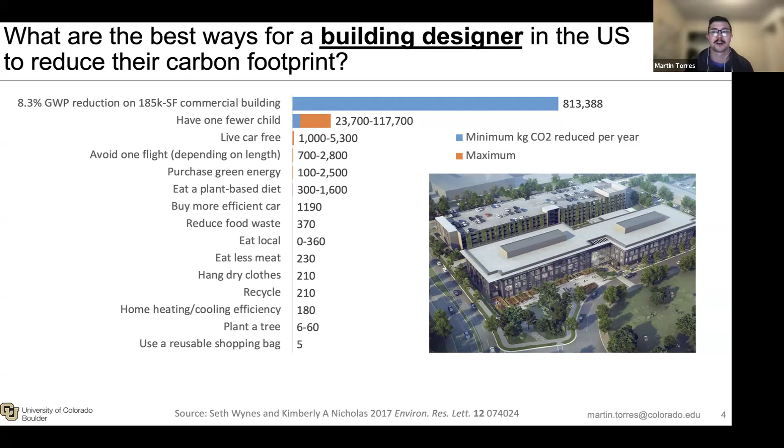So I think it's really important for us as building designers, as people in this space, to realize the potential for reduction that we have, and this massive responsibility, not just in our day-to-day lives in terms of living car-free and doing these other things, but much more so on the buildings that we're designing. We need people in the building space to measure and reduce embodied carbon on their projects. But how do we do that?

The main tool that people use is called life cycle assessment, LCA. Again, we're talking about embodied carbon, that's greenhouse gas emissions from the building materials, not operational emissions from energy use. LCA, at its most simple, works like this: you have some sort of material quantity estimate for each material in a building. So you figure out how much stuff is there, what type of stuff it is. For each of those materials, you find an embodied carbon coefficient. So what's the history of this material? Where did it come from?

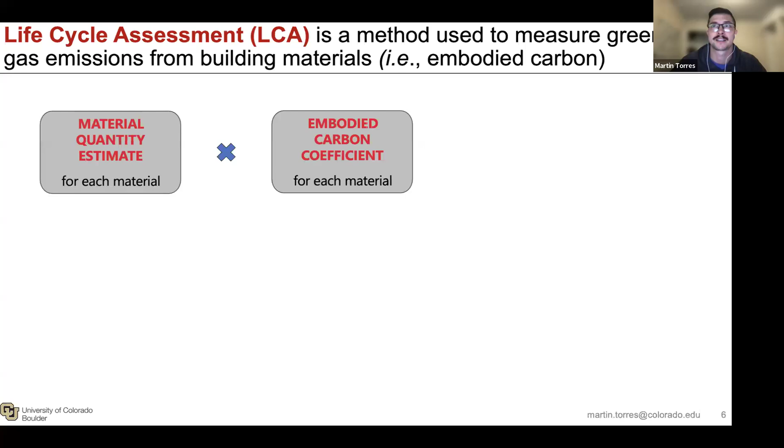What are the emissions that took to get this material from the earth into the building? You multiply those together and then you add them up across materials. So very, very simple, very, very easy calculation. Why would you need to do a whole PhD about this, right? So LCA is typically a deterministic process, just like this.

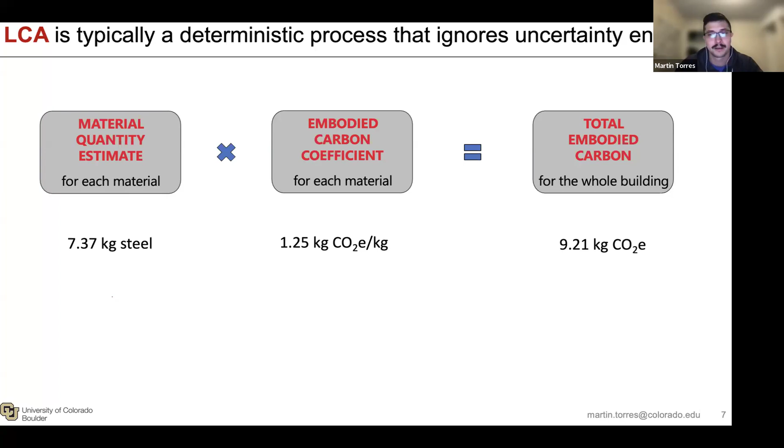We're ignoring uncertainty entirely. Now, what I mean by that is that in terms of our material quantity estimate, we have a single value estimate; in terms of our embodied carbon coefficient, we have a single value estimate. So we have a given amount of steel, we have some specific amount of embodied carbon per kilogram of steel. We multiply that together and we get our total embodied carbon, and then we can add it up across different materials. But that begs the question, how precise are these values?

Do we know that it's 7.37 kilograms of steel? Do we know that it's 1.25 kilograms of CO2 per kilogram of steel? And to answer that question, I think it's important to figure out, where did we get this data? Where are these assumptions coming from?

I will note that my research, this presentation, we're focusing on the embodied carbon coefficient. There is certainly also uncertainty associated with the material quantity estimate. I mean, you think about how a project evolves from SD to DD to CD, and then what changes happen as it's getting constructed. But today we're just focusing on the embodied carbon coefficient.

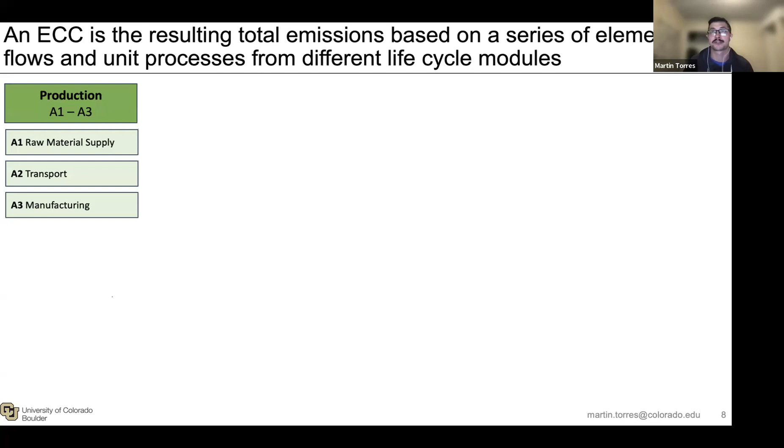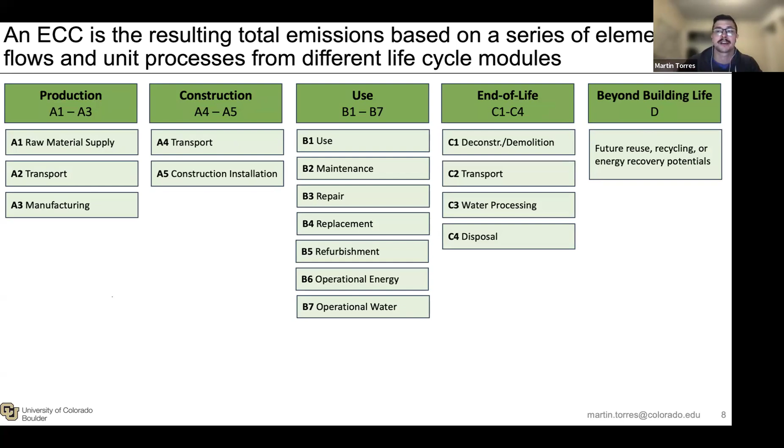So an embodied carbon coefficient, an ECC, is the resulting total emissions based on all these different processes from different life cycle modules. So we split it up into different categories from the life cycle of a material, starting with the production phase, A1 to A3. This goes through construction, A4 to A5. The use phase, once it's in the building, B1 to B7. End of life, so end of the building life, and then beyond building life. So if you're extending the life of a material beyond that of the building, reusing it or recycling it in some way, that's module D.

And these can get categorized in different ways. So A1 to A3 is considered cradle to gate. This is where the majority of emissions happen. This is also where we have generally the highest quality data. There's also cradle to grave, going through end of life. Or you can do cradle to cradle if you're considering how that material exists beyond the building life.

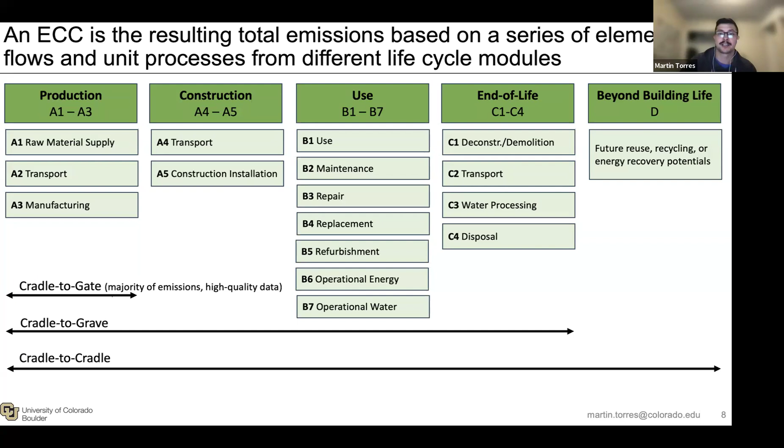So this is all kind of the scope of what an LCA might consider. We're going to focus on the production stage. Again, it's where the majority of emissions happen. It's where we have the highest quality data. And when you do an LCA of a specific building material, a specific building product, these results are communicated in the form of an EPD. Yeah, this is typically A1 to A3, but this is the scope that we're focusing on.

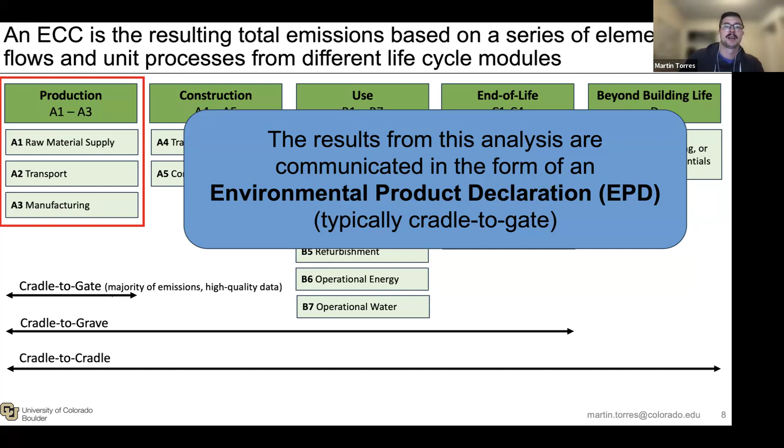So EPDs vary in scope. You can have generic EPDs, you can have supply chain or product specific EPDs. A generic EPD might be what you've seen from NRMCA. So they kind of take their best guess at this strength of concrete in this region looks something like this. Here's our best estimate of what that looks like. So it's kind of trying to capture a range of different concrete products.

And then on the other side of the spectrum, we see supply chain specific or product specific EPD. So this is an EPD for an exact mix of concrete from a specific plant. But the reason that this is a spectrum and not just 2 separate points is the source data for a supply chain specific EPD can also vary in scope. So maybe it's relying on very specific measurements taken at that facility. Maybe it's relying on more generic data. Maybe it's relying on some sort of assumptions to inform that specific concrete mix.

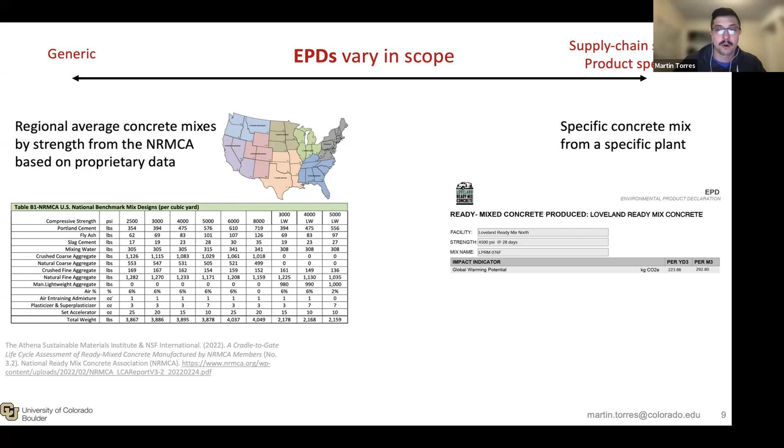So the whole point of this is there's a big range in scope in terms of these EPDs. Not all EPDs are created equal. Some of them are informed differently. Some of them are much more specific to specific processes.

And part of the problem for designers, when faced with product-specific EPDs or industry average EPDs, is which one do you pick? And we certainly don't have EPDs for all materials or all products. So if I don't have an EPD, do I pick a deceptively precise industry average EPD that's based on data that I haven't seen? Or do I pick a potentially inaccurate EPD that represents maybe a similar product to what I'm using, but not the exact product that's going into my building?

So many products don't have EPDs. So if you don't have a specific EPD for what you know you're going to use in your building, which one of these do you pick? This uncertainty can be particularly relevant in early stage design.

So if you're just starting a project, you might know, well, I know I'm going to have a 4 KSI mix for whatever sort of assembly, but I don't know who I'm going to get it from. I don't know where it's coming from. And so how do we reflect that uncertainty rather than picking a potentially incorrect value?

And any of these deterministic methods, so if I'm in any way picking a single value, that's hiding the underlying uncertainty. So what other data is available? What other information might go into this decision? So what if we created a probabilistic model to represent this uncertainty?

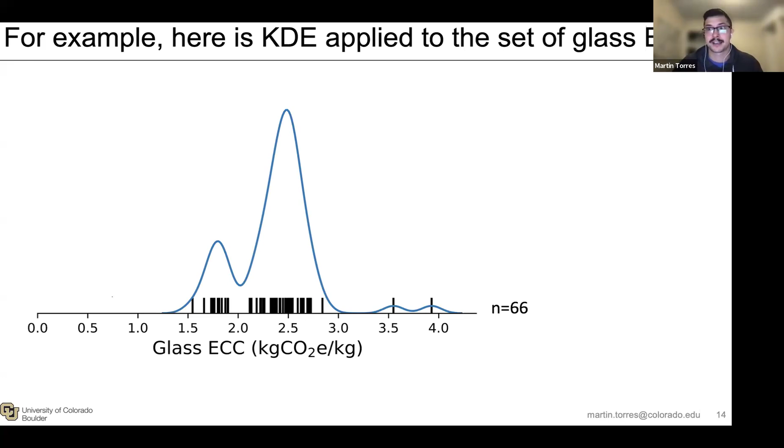So when we use KDE, it fits very closely to what we think the data looks like. So it's capturing the irregularities of the underlying data set. If we look at a normal or a log normal fit, or basically any other distribution, it's hiding those underlying characteristics. So we're masking what the data actually looks like in favor of a more simple distribution. And through this research, we show that KDE across different ranges of data sets more closely adheres to that underlying data. So more often than not, it is the closest fit to the data.

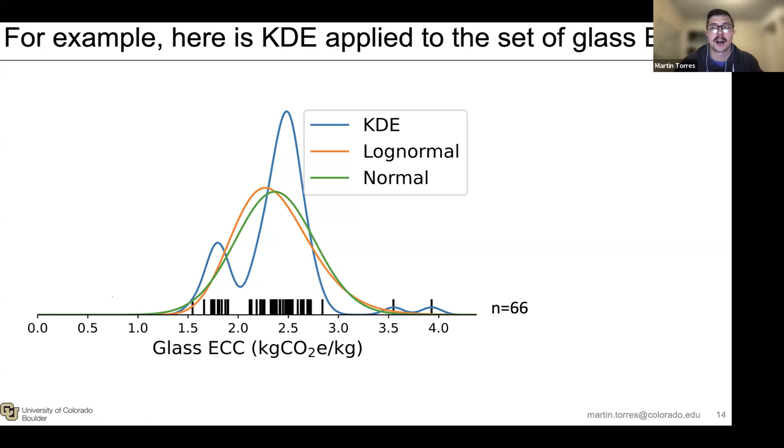So how do we use KDE in a probabilistic whole building LCA? So if I do an LCA using this method, what does it actually look like? So step 1, if we're doing an LCA of a building, we need to get our material quantities for the building, same as a normal LCA. Then we obtain sets of embodied carbon coefficients for all of those materials. So we look at which embodied carbon coefficients might be relevant for our material queries. Then we use KDE to create our probabilistic ECC models.

From there, we use a technique called Monte Carlo simulation to perform our probabilistic LCA. Now, basically what that looks like is we have a series of distributions. We randomly sample from each of those. We multiply it by the material quantity, and we get a result. But then we repeat that process, randomly sampling, multiplying, and we get a set of, let's say, 10,000 results. And so then those 10,000 results would reflect our range of expected results, because we've randomly sampled from all our input distributions. So this is what we think is a reasonable take on the range of expected results.

So for the results, we're looking at whole building embodied carbon intensity. And sorry, when I say embodied carbon intensity, we calculate our whole embodied carbon and we divide it by the floor area of the building. Some people use conditioned floor area, some people use gross floor area. In this one, we use conditioned floor area. So we have our set of expected values for whole building embodied carbon intensity.

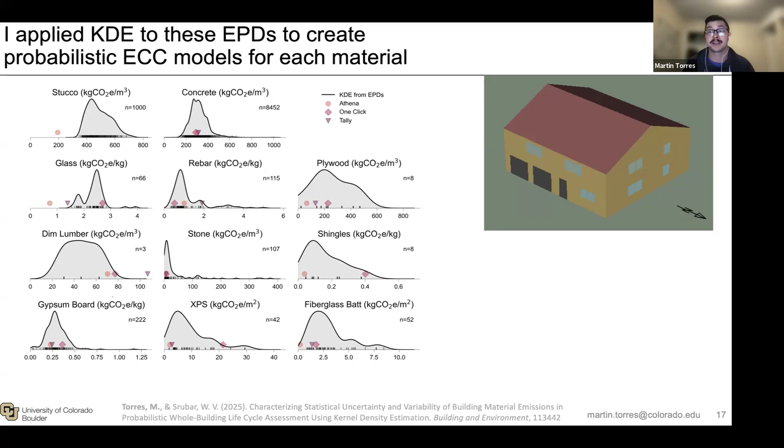Now we're showing these results alongside deterministic LCA values or ECC values from Athena, One Click, and Tally. So you can see those nestled in these probabilistic models just to show how closely they align with industry expectations. But this is what we're using. So when I mentioned the Monte Carlo simulation, we randomly sample from each of these distributions, multiply it by the quantity, add them up, and then repeat that process to get a range of expected results.

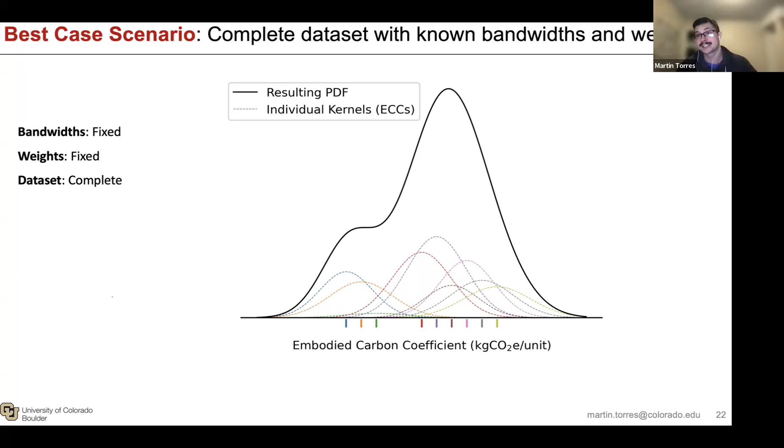But that is entirely unrealistic. EPDs don't really have specific weights. We're not always going to know all these different features, but this is kind of that gold standard that we're aiming at. But because we're not likely to have all this information, what can we do?

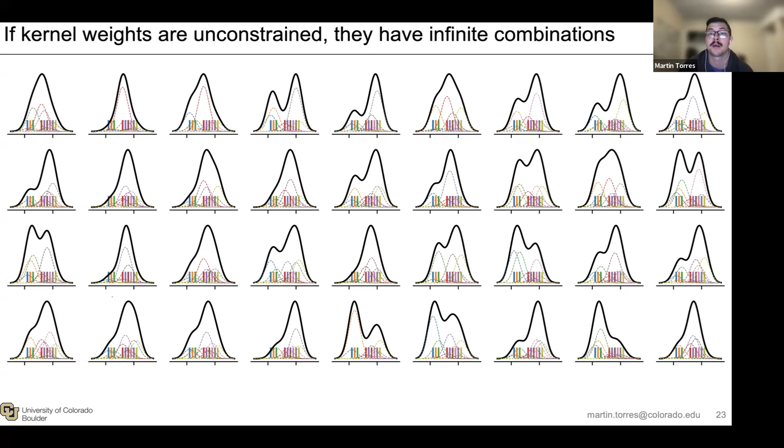So if kernel weights or the material quantities are unconstrained, we basically have infinite combinations. So if we don't necessarily know that they're equal, but we don't know what they should be, well, there are infinite answers to that. In this kind of made up case, we have 9 values. So how many ways can 9 values add up to 100%? And how does that change what the probabilistic model looks like? So basically what we can do is we can explore different solutions in this space. We can explore different viable combinations of these weights that fit our constraints.

So if we don't know anything about the weights, we're going to explore all possible combinations. And at this point, basically we have uncertainty about our uncertainty. So if we're saying we don't know what these weights could be, here are all the combinations that they might be, here's how much our resulting probabilistic model changes. So here's kind of the fuzziness around that probabilistic model that lets us know how confident we should be in it.

And by randomly sampling through these weights, here we have 9 values. So each of them, we're assuming we don't know that one might be bigger than the other. So they have the same average of 11.1%. But we're randomizing how we combine them. And so this is exploring all feasible solutions of 9 values that add up to 100%.

But if we think about how we might actually get material production quantities, they're usually in some sort of aggregated format. So here's an example for steel. To get steel production data, World Steel produces it by country. So if we look at steel by country, then that's kind of our subgroup that we can consider. So we have total steel, we have an amount of steel from the US, that's 4.2% of global steel production. If we have 66 EPDs, what we can do is we can vary the weights of those 66 EPDs such that they always equal 4.2%. And I'll show you exactly what I mean by that.

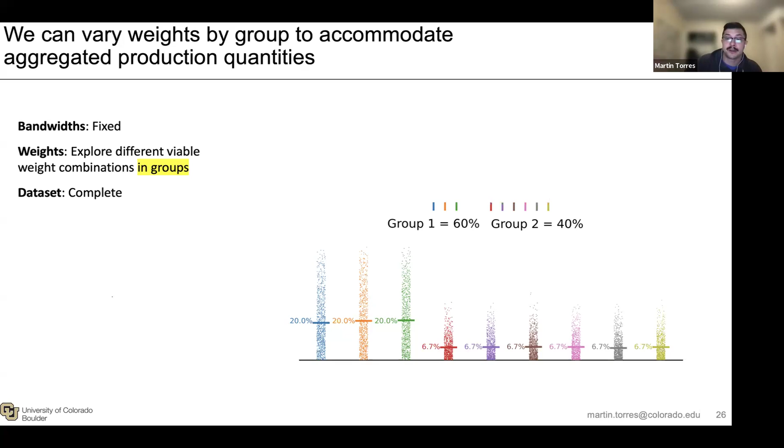So in this instance, rather than exploring all of the weights separately, we can explore in groups. So if we know group 1, these 3 values, represents 60% of the data set, then we randomly sample from these 3 values, with a mean of 20%, in all different ways that 3 values can add up to 60%. Now, if the second group, the other 6 values, adds up to 40%, we do the same thing separately with those values. And then that's reflected in our model.

So in every single instance of this model, group 1 adds up to 60%, group 2 adds up to 40%, but we're exploring different viable combinations of those weights, because that's kind of how we get our material production data.

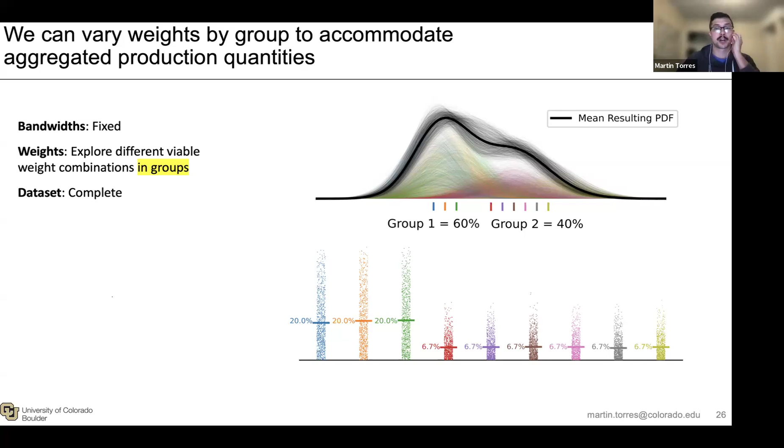Now we have 2 other things to account for: unrepresented data and the industry average ECC. But let's recap what we've covered this far. So the first version, KL1, doesn't consider important EPD features. KL2, we're trying to accommodate that. So material production quantities, that corresponds to kernel weight, or the size of the kernel. If they're unknown or we have grouped weights, we explore multiple viable weight combinations given those constraints.

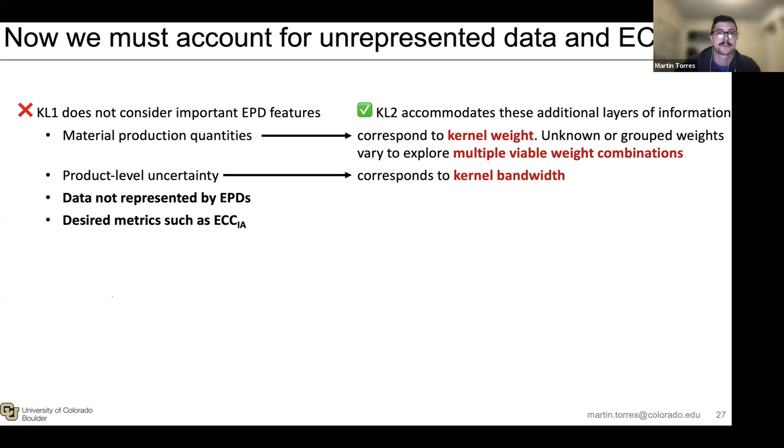Product level uncertainty, so depending on how much generic or supply chain specific data we have, that corresponds to kernel bandwidth, or the width of each kernel. Now the 2 remaining bits, data not represented by EPDs and desired metrics such as the industry average ECC. So our problem is if we apply uniform kernels, the resulting plot does not necessarily have an expected value equal to our industry average ECC.

But if we have unrepresented data, what if we simulate that unrepresented data such that the expected value of the resulting plot is equal to our industry average ECC? So we're kind of using that as our target expected value, and then we're simulating this phantom kernel that captures unrepresented data. So if my EPDs represent, let's say, 80% of the market, then that phantom kernel would have a weight of 20%, and we would put it in a place such that the expected value is equal to our target, our industry average ECC.

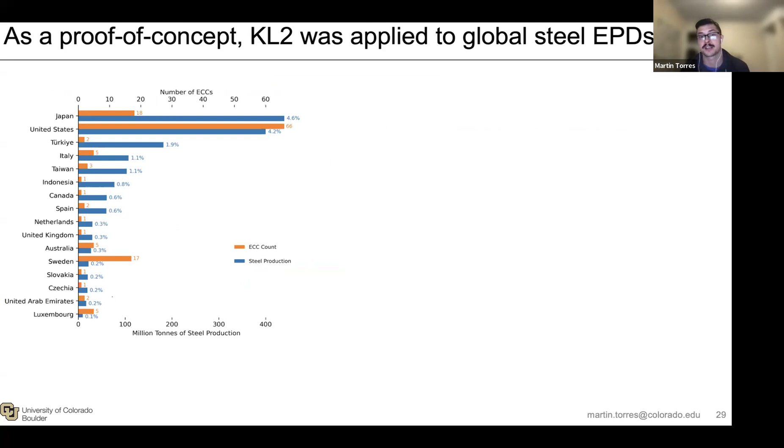So as a proof of concept, we apply this method to global steel EPDs like I was just showing. So we have a number of EPDs from all these different countries. Here you can see both the proportion of steel production and also the number of EPDs we have from each country. So for the US, again, we have 66 EPDs, it's 4.2% of production. So those 66 values will always add up to 4.2% of the weight.

Now, because our representativeness here is only 17%, we have a lot of uncertainty associated with our resulting probabilistic model. So basically what this tells us is we need to get more data. We need to have more representative data. And one of the big reasons for this was that China is responsible for something like 50% of the steel production, and we didn't have any EPDs from China. But what this tells us is if we're going to use these data to create a probabilistic model, it's not necessarily that reliable yet. And so it's good to get that feedback that we're understanding the uncertainty about our uncertainty, basically.